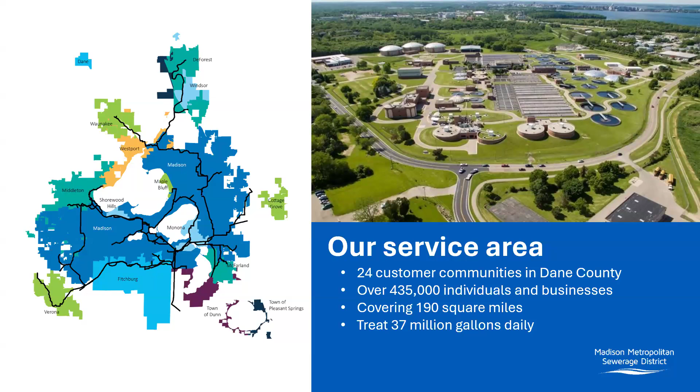On a lesser scale, project drivers like regulatory and resilience, we have very few projects that have those as the primary driver.

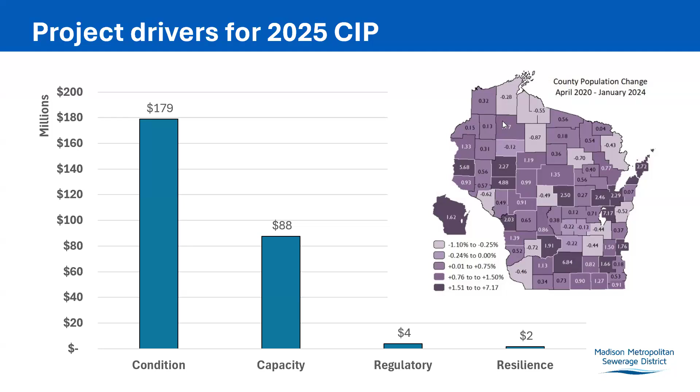Our last 50-year master plan was done in 2009, and this looked at very long range or strategic objectives for the district. Things like, should we continue to convey all the wastewater here to the Nine Springs plant at a central location, or build satellite treatment plants around our service area? Other issues explored were balancing watershed balance and also reusing effluent from the plant.

But very rarely do projects from the master planning process lead directly into the capital improvements plan. Where most of our projects come from is facility planning, which has a much smaller time horizon, usually 20 years. This is where most of our planning work takes place, and most of our projects do involve some component of facilities planning.

For smaller projects, it can be done concurrent with design and can take maybe 2 to 3 months. For larger projects, like the treatment plant, this is a distinct planning step that takes up to 1 year and possibly 2 years to complete. One thing we are noticing is that in the past, large plant expansions required facility planning, but now we're finding that condition assessment is becoming a bigger factor. We're doing facility planning to address the aging infrastructure, which is leading to more projects in our capital improvements plan.

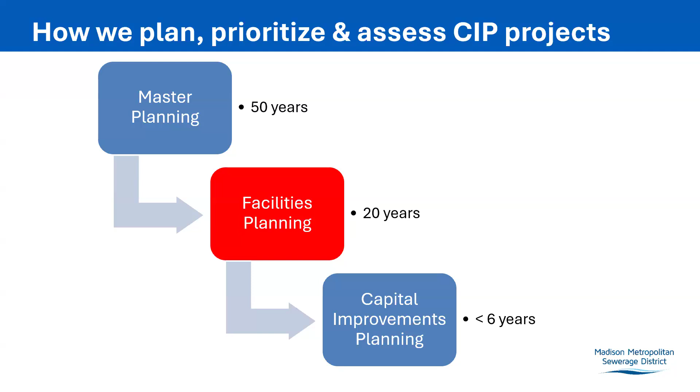Just a few more notes about facility planning. There are really 3 distinct steps. The first is you have to identify a problem or need, and as part of that you're assessing the condition of your assets. The second step is to develop alternatives to address that problem. The third and final step is usually identifying the most cost-effective alternative over the life of the asset, using both economic and non-economic factors.

For most projects, this is a statutory requirement that the DNR requires, and it's a very detailed process in their codes. And a final note on facility planning: the district uses a lot of clean water fund loans to finance bigger projects, and the DNR requires that facility plans be used for that process. So by default, the district does use facility planning for most of its larger projects.

With that, I'd like to get into one of our large facility planning projects that we just kicked off, started last month. This is for our Biosolids facilities plan. Basically the operation of the plant separates solids from the liquid stream. The liquid stream gets treated, disinfected, and returned to streams miles downstream of the plant.

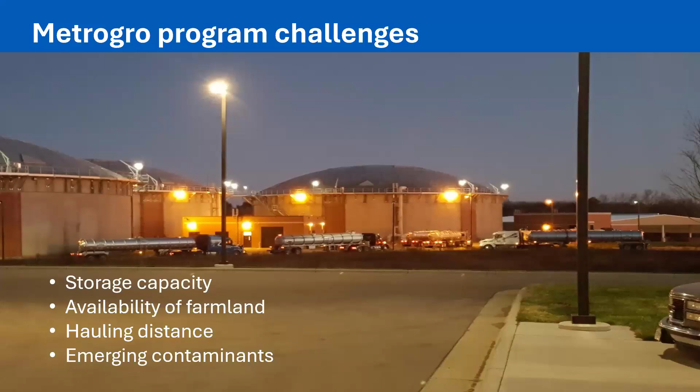And then the final challenge is related to new contaminants that we're seeing. I'm sure everyone has heard a lot about the forever chemicals, PFAS, that is both in our raw wastewater and our biosolids. So we have to be mindful of that challenge as we move forward.

Some of the things that our consultant will look at during their alternatives analysis for this project: we think that we will continue to land apply biosolids going forward. So one option is, can we optimize and expand the current system, likely by providing additional storage tanks and improving our ability to get the biosolids away from the plant.

We'll also be looking at the different processes that we use to produce biosolids. Every aspect of the process, the thickening, digestion facilities, mixing and heating of the digesters will be looked at to make sure we're doing things in the most cost-efficient way and reducing complexity where possible.

And then a final component of the study will be evaluating methods for future treatment of PFAS and other emerging contaminants.

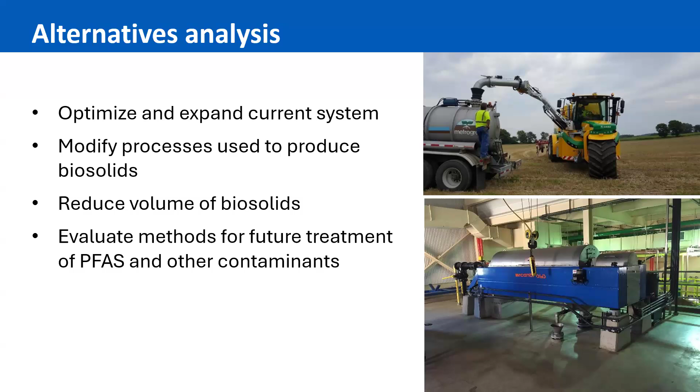The other facilities plan that we're working on currently is called our Heat and Power Facilities Plan. This one is a little ahead of the Biosolids project. It began in June of last year and is set to complete at the end of this year. This plan really looks at our biogas generation and our use of biogas.

Beginning in the early 80s, we started using biogas to generate electricity. We have 3 large engines at the plant, 2 of which use the biogas as a fuel to generate electricity, and 1 as a blower that provides air for the activated sludge process.

The engines also put out a lot of heat, so we're able to recover that heat and use it to heat our hot water system, which then in turn is used for many processes at the plant, as well as building heating and cooling. So it's a very valuable system, it helps us offset a lot of energy costs from our local utility.

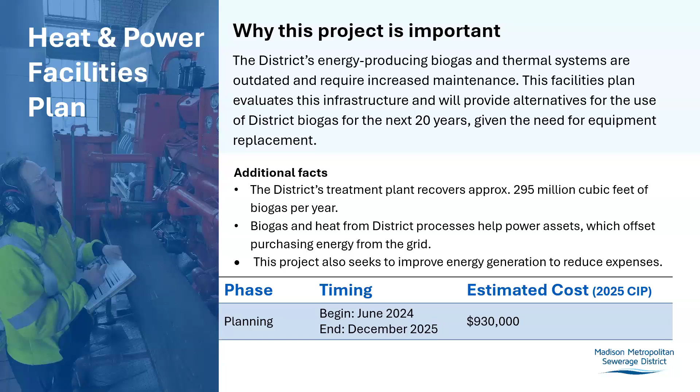But like the biosolids infrastructure, it is aging. It's been in use for several decades, and we need to reevaluate how we're doing things and how we're going to use biogas for the next 20 years.

So here's a picture of one of those engine generators, what we call aging assets. Again, they serve us very well, but they have been prone to failure in recent years. They have been rebuilt several times, some of them. And when that happens, we can't use them to generate electricity. We have to flare the gas many times, and it also takes up time to maintain them.

So what this study will do, next slide please, is in process, but one thing we've already evaluated is the biogas facilities, how they're operating, what we would need to do to improve them. At the same time, on a separate track, we're looking at the heating system. That work has been done, and now we're in the final stages, coming down the home stretch, looking at how we're going to use our biogas in the future.

One alternative is to keep doing what we're doing, basically generating our own heat and power, but only modernizing the equipment, doing it more efficiently. The other pathway is completely different. That would involve treating the gas to a higher standard, removing the impurities, and then selling it for resale, similar to what the Dane County landfill does.

So we hope to have that answer by the end of the year. We don't have any of this infrastructure in our capital plan yet. We're waiting to see what the outcome is and how it interfaces with other projects, but more to come on that in the months to come.

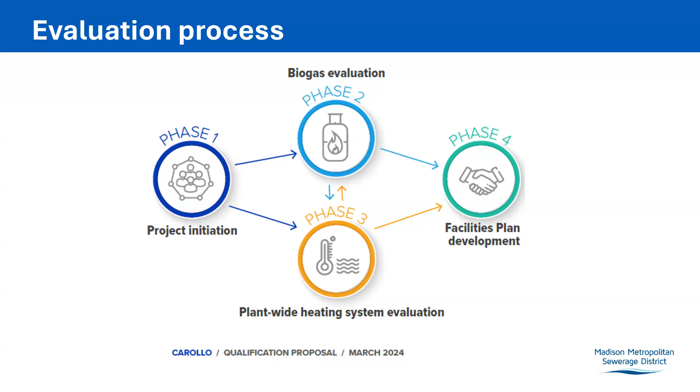Thanks, Todd. Todd covered the facility planning efforts that we have at the treatment plant. So I'm going to explain a little bit more about the facility planning level and our process that we use for the collection system.

So we'll start with capacity. About every 10 years, the Capital Area Regional Planning Commission helps provide population projections and other flow projections from other uses, like commercial and industrial customers in our service area. And that information is based off of census data, so that's why we have that kind of 10-year evaluation process. When we get that updated census data, the projections are then projected out even further.

Those numbers are used in usually 20-year increments, with 5-year periods in between. So we take those flow projections and route them through the collection system, look at how the flows behave, and apply a peaking factor for wet weather events that can occur and cause higher flows in the system. We look at where we're starting to see capacity concerns over those time periods, and where capacity concerns are identified, those become recommended projects that we start planning for. So as Todd mentioned, that facility planning horizon is typically 20 years, but looking in those 5-year increments helps us program them in the appropriate time in the CIP.

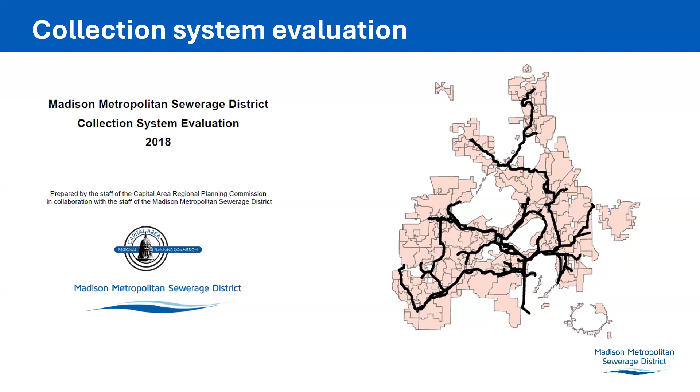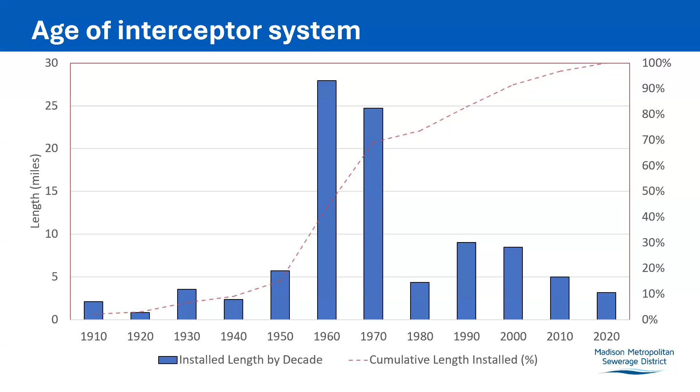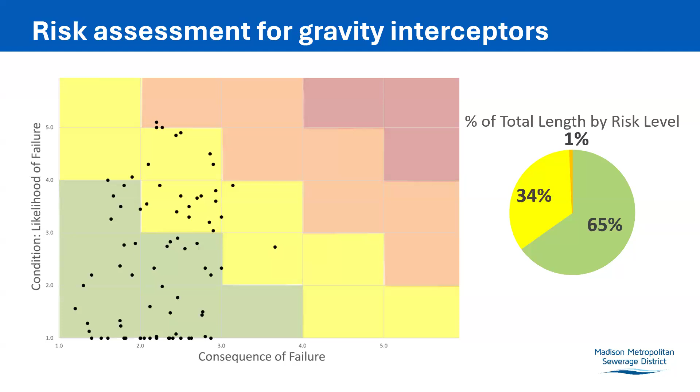So when we're talking about rehabilitation or addressing these concerns, the most common method we'll often return to is what we talk about as lining. So the 2025 CIP had 8 lining projects included for a total estimated cost of $20.5 million over that timeframe. 2 of those projects are being completed this year, one already has been and one's already in construction. So that's great. And the remaining 6 projects, and as I said, there's a few more that will get added as part of our updated assessment process.

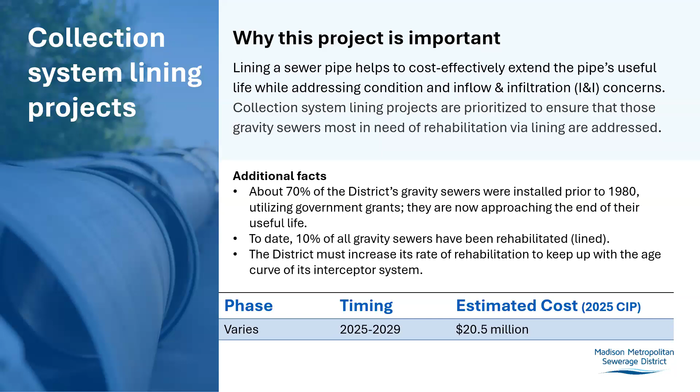So lining a sewer is more cost effective. It really involves just putting a new pipe inside the existing pipe. It's done trenchless, meaning we're not digging to complete that work. And we, going back to that age of the interceptor system, and I noted that lumpiness, so we recognize that we will need to increase our rate of rehabilitation to keep up with the age of the system.

So I've talked a lot about the condition scores and the risk ranking in general terms, and I just wanted to highlight a couple of examples and explain why age is not our only criteria to use to select these projects.

So from left to right, we're going from oldest to newer. So far left, our West Interceptor Babcock to Dayton project that's included in the CIP. That pipe was installed in 1916, and it's a 24-inch cast iron pipe. Cast iron, as it deteriorates, you get corrosion that happens on the surface, so it kind of looks like rust. And that kind of, those sheets start thinning, and so you end up with wall loss. A failure then often happens once that thickness is gone, you get holes in the pipe.

So yes, here's an example of infrastructure that we have that is over 100 years old and is on the list to be rehabilitated, but has not been completed yet. So just tying it back to that risk-based matrix, in this case the condition score is 5 out of 6, so very much in that we need to address zone. But when you consider some of the consequence of failure and then do an ordinal ranking, that is falling as ranked 10.

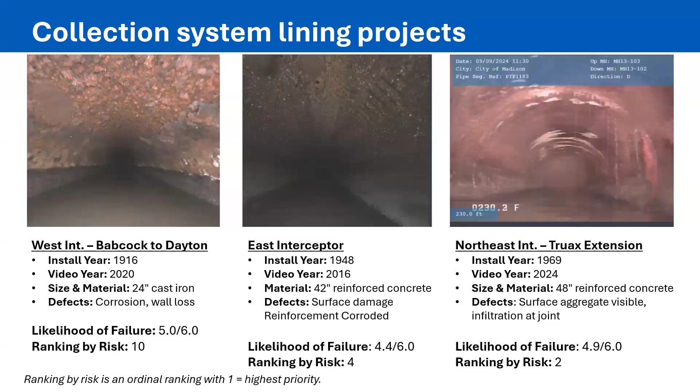So that was a 48-inch concrete pipe up by the airport, required night work, a large truck bed to bring in the liner, a crane to lift it, and the bypassing system was very large. So when we talk about lining projects as a group, they're not all the same. The costs aren't going to be the same, and the level of effort and challenges that you're facing can vary greatly.

So I'm going to transition over to Lisa. I had mentioned the Northeast Interceptor was number 2 ranking. The number 1 worst ranking interceptor based on condition is the Nine Springs Valley Interceptor System. But it also has capacity issues, so Lisa is going to talk about the capacity project.

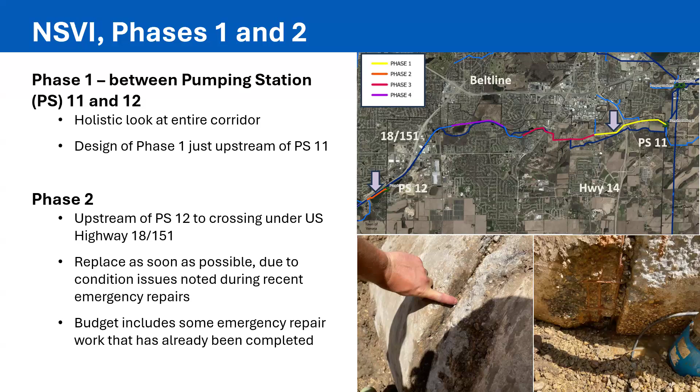Next slide, please. All right, the next project I wanted to talk about is a project at the plant, the W4 project. This is not a high cost project compared to some of our others, but we wanted to highlight it because it illustrates that you have to spend money in order to save money.

So what is this project? The W4 system is an existing system at the plant that needs to be replaced, reaching the end of its life. What the system does is allow us to use treated effluent from the plant for various non-drinking water uses.

So we use the W4 water as wash water for several things, including our screening system and headworks, wash water for the gravity belt thickeners, cooling sludge storage, and even flushing some toilets in the plant, among other things.

Using treated effluent in this way allows us to avoid buying about 300 million gallons of city water annually, and avoid spending about $2 million in city water purchasing costs annually. By replacing this system and continuing to use it, we continue to avoid these additional costs. So how does the system work?

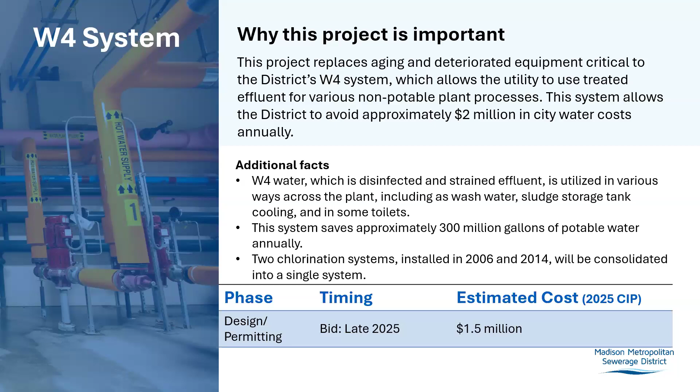In order to make the W4 water, we strain and chlorinate effluent. We currently have two chlorination systems, and with this project we will consolidate those two treatment systems into a single system. You can see here on the slide some pictures of the equipment related to the project that we're going to replace.

As I mentioned, we currently have a second chlorine dosing system in our struvite harvesting building. That system is slightly different - it's a dry calcium hypochlorite briquette system, which has presented maintenance challenges over the years. So we are planning to remove that system and just have the liquid sodium hypochlorite system in Headworks.

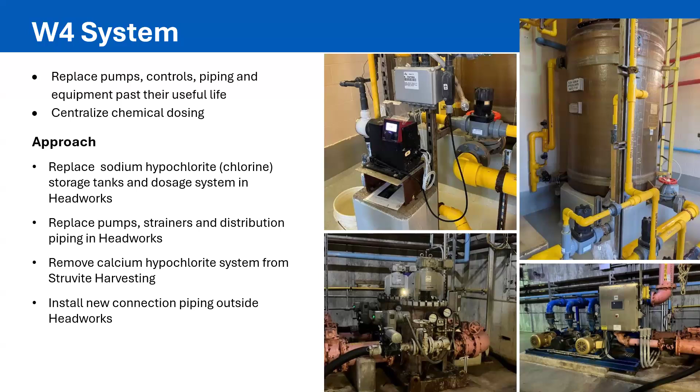In order to do that and go down to a single system, we'll need to add a new piping connection, which we're also planning to include with the project. This project is currently in design, and we're hoping to bid it probably late in the summer or early fall. All right, next slide, please.

All right, the last project I'm going to talk about before I hand it off is the Lagoon Dikes project. Why is this project important? This project is a little unique - it's a resiliency project, intended to prevent flooding of Lagoon 2.

Lagoon 2 is across Moorland Road from the plant. Why don't we want Lagoon 2 to flood? Well, it's a closed Superfund site, and we're obligated to maintain its integrity. Ultimately, this project is about protecting Nine Springs Creek, the adjacent waterway, and preventing the release of PCB-containing materials into the environment.

This project was precipitated by the regional flooding that occurred in 2018 - many folks remember that year. At that time, the dike surrounding Lagoon 2 was nearly overtopped. It didn't overtop and nothing bad happened, but we'd like to prevent a close call like that from happening during future flooding events. All right, next slide, please.

So just a quick history of the lagoons. Biosolids were stored in the lagoons until about the 1970s, when our Metrogro program began. Then in the 1980s, it was discovered that some of the biosolids in the lagoons contained PCBs. In 1990, the site was placed on the EPA's National Priority List, another word for Superfund.

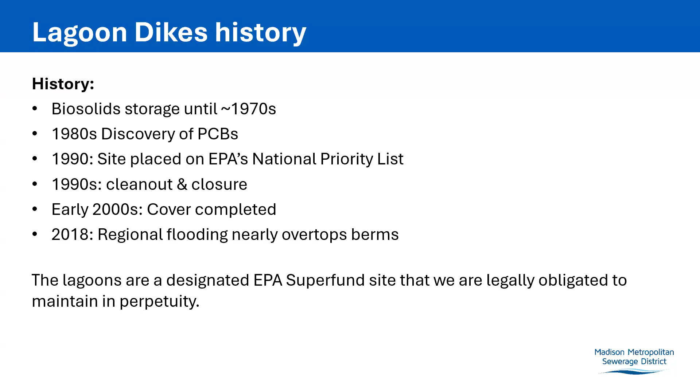Okay, so what are we planning to do with this project? This is a project that sounds simple, but is actually kind of complex. It sounds simple to just raise the dikes a little higher, but

the challenge here is that there are very soft soils below the dikes. It has been a challenge to come up with a design that is constructible with lightweight equipment and gives us enough height on those berms without adding too much weight. We don't want to add too much weight because we don't want to cause even more settlement to those berms. So that is kind of the technical challenge with the site.

There is also permitting challenges with the site. Permitting for the site is complex because of the presence of wetlands, waterways surrounding the area, a floodplain that we are within. We have to deal with federal requirements for the Superfund program, et cetera. So we have been working on permitting with Dane County, DNR, EPA, Army Corps, among others. So very complex permitting for this site.

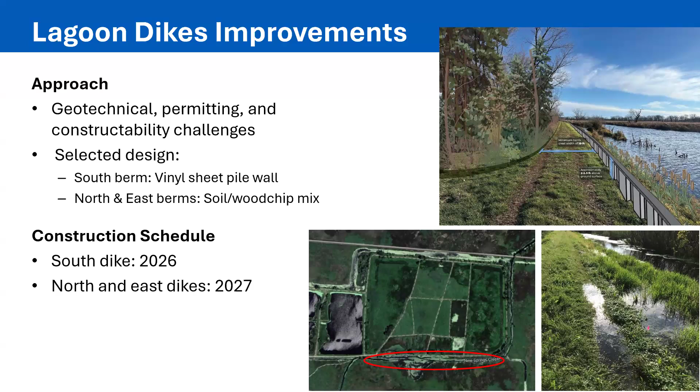Okay, and with that, I will hand it off. I believe Alan Grooms is up next.

All right, thank you, Lisa. Yes, Alan Grooms, I'm the operations manager for the Madison Metropolitan Sewerage District, and I'm going to talk about a couple of projects we've got going.

This one is one of the bigger projects we've currently got going. This is liquid processing improvements phase 2, and this project, just stating that we've got multiple phases, we recently completed phase 1 of what we called liquid processing improvements, and that was focused on the hydraulics of getting higher flows to the plant.

We were really looking at high flows from like a storm event or something like that, where we typically handle about 40 million gallons a day, give or take. We're talking about how do we get flows like 180 million gallons a day through the plant. At that point, you're not focused on treatment, you're focused on getting everything through the plant and getting basic treatment and not spilling is what it really comes down to. So that project was recently completed.

That's given us the capacity to handle the hydraulics, but what has not been addressed is the load that comes with that and the day-to-day load that comes with that. That's really what this project is primarily focused on: capacity. There's also an element of replacing outdated equipment.

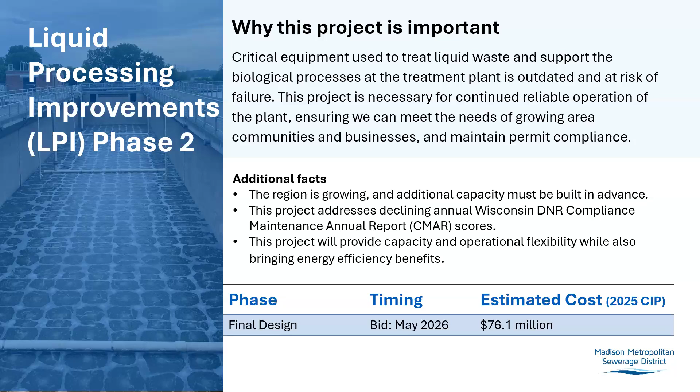So this is showing a little bit of the behind the scenes, what we looked at with evaluating what our needs would be for phase 2. So as Todd mentioned earlier in the presentation, we're working off a typical facilities planning window of about 20 years. That kind of gets out.

You can do a 50-year master plan, you can try and guess what things look like in 50 years and you might get it pretty close. But 20 years is generally the accepted window for planning an actual project, because beyond that it starts getting harder to forecast accurately. You may overshoot or undershoot how much capacity you have.

And so that's kind of the generally accepted planning window. So we were estimating this project would come online about 2030, and so we have a planning window that goes out to 2050.

The population in the service area in 2020, when we started this process, was 408,000 people. We're looking at 2050, and that's going to be up to 558,000. That's the forecast value. Similarly, our plant flows are estimated to go from about 40 to 43 MGD that we were in 2022 up to approximately 57 in 2050.

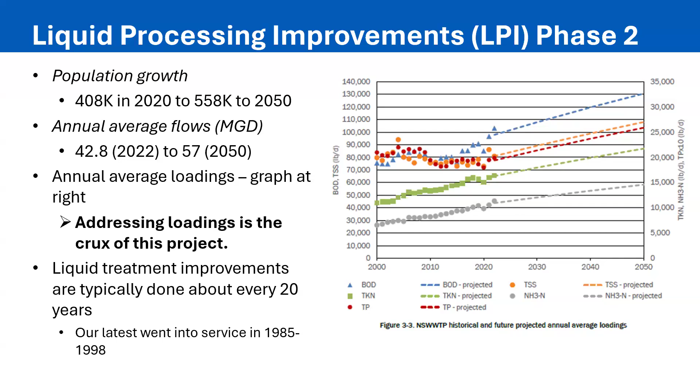This gets more into what we're doing with this project and what's going to be in it. We use the term hybrid BNR, biological nutrient removal system. We are required to treat the biochemical oxygen demand, or BOD, a commonly accepted measure of how much carbon loading is coming to the plant. We also have nitrogen that demands air, and then phosphorus. We are able to meet our phosphorus limits also with the biology in the plant.

We basically construct these plants with big tanks, very specific designs, in order to manage and achieve those levels of treatment we need to meet our permit. The good news is with this process, we were able to do this without adding additional structures or tanks, with the exception of a post-aeration tank, which I'll explain a bit.

What we're doing with this hybrid system, we've been researching for a number of years what we call low dissolved oxygen operations, running at a lower dissolved oxygen level in the tanks to get different microbiology to do work concurrently, working at the same time to do multiple things. Our research has indicated there's a lot of potential with this, and there are other plants doing this work scattered through the country, so we feel like this has got really good potential.

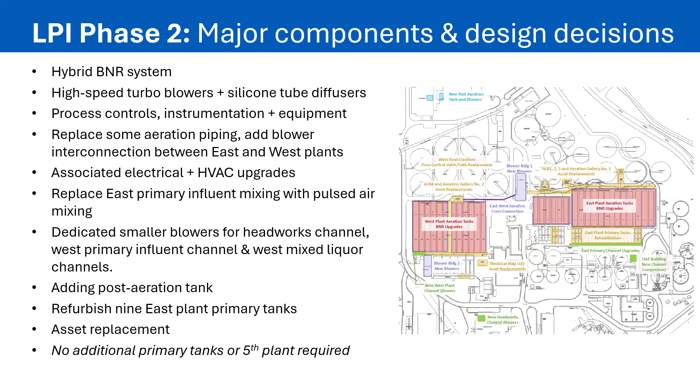A few things we're doing as far as technology - I brushed over some of these, but we're looking at integrating the blowers and trying to use the same type of blowers. We've got a mix of blowers right now, including aging infrastructure - a couple of our mainline blowers are from 1962. I don't know how many people on this call are older than that, but those are older than me. They're still doing good mainline service, but it gets harder to maintain and get parts for units that old, and you can imagine the motors aren't as energy efficient as what you can get today.

The high-speed turbo blowers are basically like a standard centrifugal blower, but they're a lot more energy efficient. They run on a magnetic bearing to reduce friction and reduce those parasitic energy losses. They turn at a really high RPM and push out air, a smaller unit to put out the same amount of air.

We're estimating that with this low DO process we're talking about using, we could reduce our energy purchase by about 18%, using that biological process, and we think we can get as good or even better effluent coming out of the plant with less energy input. So we're pretty excited about it. Even if that doesn't work, with the fallback plan I talked about, we still think we'll get about 7 to 11% energy reduction just with some of the more modern, energy efficient equipment.

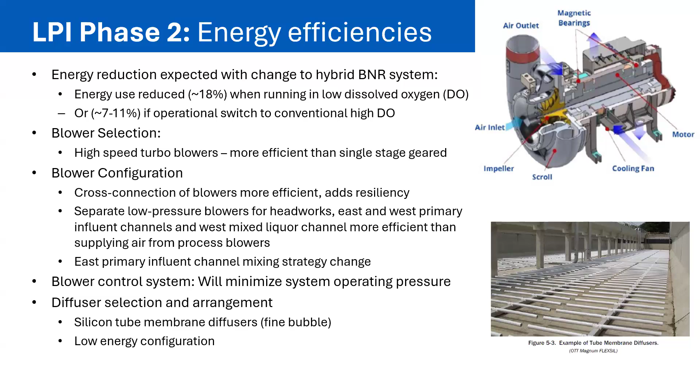And then the other thing we're moving to, we made a selection to go to what we call silicone tube membrane diffusers. It's basically a fine bubble diffuser - a way of bubbling air into the tanks - but it should be even more energy efficient than the system we have now. Next slide.

I'll move on to a different project now. This one is an improvement to a process we've already got, the Ostara nutrient recovery system. What that does is struvite harvesting. Struvite might not be a term familiar to many of you, but with the hard water, particularly high in magnesium here in the Madison area, and anaerobic digestion, we get a lot of magnesium in the water, the ammonia, and then the phosphorus that comes from the biological phosphorus removal. All those combine, and our plant has really struggled, as have many others, with a nuisance chemical precipitate of phosphorus referred to as struvite.

In the solids handling system, the biosolids portion, the struvite will tend to precipitate out and form nuisance deposits that waste energy, waste capacity, and require physical removal in many cases - chipping and breaking, opening up pipes and chipping that out to remove it. That represents a lot of labor and cost in order to keep the system running.

We've struggled with it for many years on how to control that. We ended up putting in, as part of the 11th addition of Nine Springs, which went online in 2013-2014, a struvite recovery system to remove some of that phosphorus from our solids stream before it goes to digestion. That has dramatically improved the issues we have there, reducing the cost of maintaining and keeping the solids handling process operating.

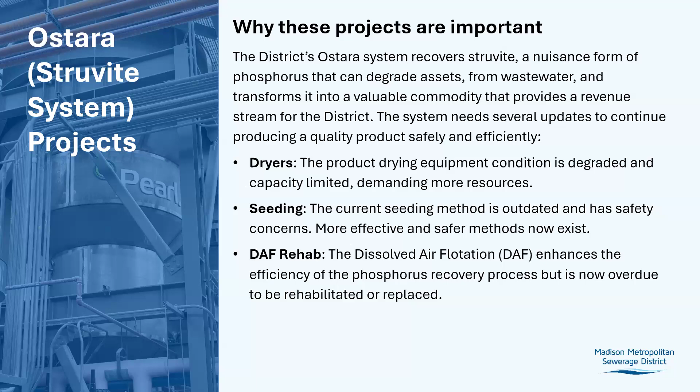So I mentioned the dryer and seeding improvements. For the dryers, the physical condition has deteriorated. They require a lot of - material comes in as a wet slurry of product. That wet environment and the cleaning means we've had to use a lot of maintenance. Some of the early dryers, quite honestly, weren't configured the best to allow maintenance, which has led to a lot of improvising and improvements we've had to do on the fly.

As the material condition affects those, it's pretty harsh service, so those have degraded. The other part is the capacity and efficiency of units available now are much better. So we feel the time has come to look at making improvements that would improve production efficiency and throughput, and also allow us to upgrade the capacity on those.

The seeding aspect of this project - the initial system we put in, it was thought that seeding would be a really infrequent operation. Like I said, this was one of the original systems that went in. It's since been learned that we need to do fairly regular seeding on these systems.

And so the system that we have is actually pretty inadequate and it's really inefficient, and there are some safety concerns with it. So what we're looking at is saving labor and energy with getting the dryers replaced, addressing that deteriorating condition, and then addressing the issues of the seeding system.

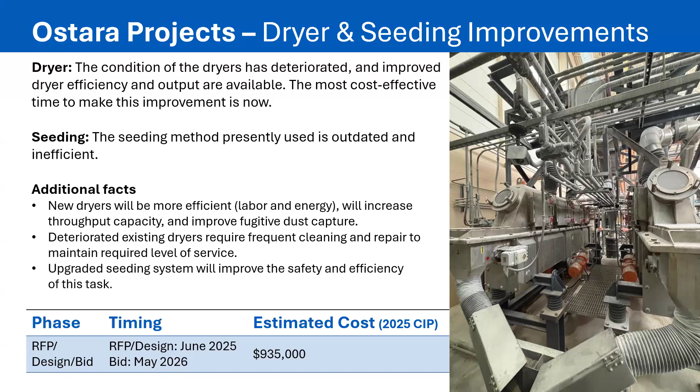And then the DAF rehabilitation, I mentioned the dissolved air flotation. That system was originally installed in 1987, and so that was originally how we thickened our waste activated sludge at the site. That was planned to be taken out in 2013 when the 11th addition went into service.

But as I said, the Ostara system was a fairly new process at the time. Over the years, we did a lot of things to save money, and they were pretty clever innovations to transfer sludge and skimmings and things like that around the site by combining pipes rather than laying new pipes. The downside to that when we put the Ostara process on is there was a lot of extra water contained that was detrimental to that process.

And in quickly thinking how we could address that, we realized we had this DAF that had just been shut down that we could probably get to make work. So we piped it up and it did indeed work. And so instead of being retired and taken out of service, it was pressed immediately back into service and has been serving continuously since 2013.

So 1987 to present day, the exact nature of what it's doing has changed slightly, but essentially that process has continued to operate, and it's a system that at this point needs some addressing. The material condition is down because it was not planned to serve this long.

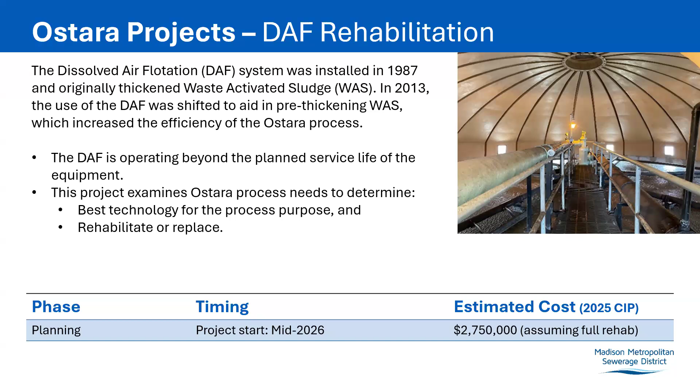So, next slide. I think I'll be turning this over to Eric Rear.

All right, thanks, Alan. I'm Eric Rear, Maintenance and Reliability Manager for the district, and I'll be talking about two relatively smaller collection system projects compared to what Alan just talked about.

But first off, I'll be talking about our Crosstown Force Main Saddle Tap Replacement Project. The Crosstown Force Main was constructed in 2002. It's a vital piece of infrastructure that connects our Pump Station 1 to our Pump Station 2. It's a 30-inch diameter pipe, stretches approximately 3.5 miles down the isthmus.

Pump Station 1 is located at First Street. Pump Station 2 is located at Brittingham Park, so basically right down the isthmus—that's how those are connected. Under our normal operating mode, Pump Station 1 is sending wastewater to Pump Station 2, and from there it comes to the treatment plant. But under emergency situations or for maintenance needs, we can convey wastewater from Pump Station 2 to Pump Station 1.

The project is really important because the risk of the saddle taps on this force main failing is rising, increasing the risk of sanitary sewer overflows in the downtown isthmus area. Next slide, please.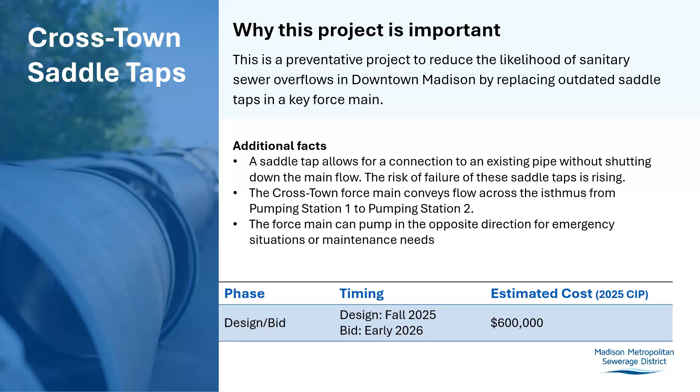So due to the topography of the isthmus and the existing utilities that needed to be crossed when the force main was installed, it had to be constructed with 21 intermediate high points. Each of these high points requires a manhole structure with a saddle tap and a combination air vacuum release valve. This allows any entrapped air to be evacuated from the force main.

The buildup of air in these high points drastically reduces the flow rate through the force main and the efficiency of the pumps, which results in higher energy costs to convey the wastewater. So that's why it's critical to get the air out of these high points when we're pumping wastewater between the two stations.

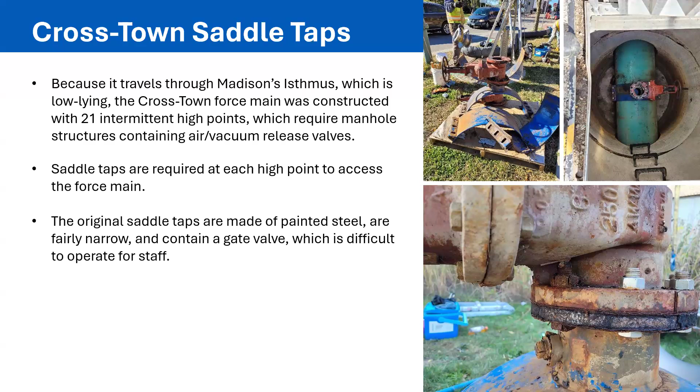In 2024, we budgeted a project to replace 5 of the saddle taps that were in the worst condition along the crosstown force main. These were deemed to be in the worst condition using our condition assessment tool, which our collection system services group uses for annual condition assessments of our manholes.

The new isolation valves are quarter-turn plug valves. So instead of turning the valve 20 times to close it, the operators or workers just need to turn that handle about 90 degrees or 45 degrees and the valve is closed — much easier, much safer for them to operate.

So in 2026, the remaining 16 saddle taps are going to be replaced in the same manner, with stainless steel saddle taps and quarter-turn isolation valves. The other 16 may not be in as poor a condition as the 5 that were replaced, but our maintenance philosophy here at the district is reliability centered maintenance — we look to repair and replace infrastructure before it fails so we can adequately plan and budget for it. In this case, we foresee these will eventually get worse and fail, so we're doing this now while we have proper budget and planning.

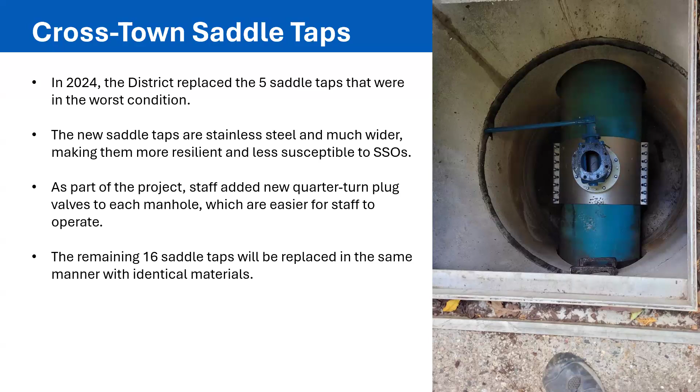Okay, second project for me is the pumping station bar screens. To start with this project, I'll go to the headworks building at the treatment plant.

The headworks building at the plant was constructed in 2005 during the 10th addition project. That building receives wastewater from 5 of the regional pump stations. During that project, we installed 3 rotating band screens as a method of screening wastewater in the headworks. These are a type of finer screen with very small holes, and their function is to remove finer debris from the wastewater.

Band screen manufacturers recommend coarse screening prior to the equipment to prevent damage and reduce maintenance. But currently there's no coarse screening implemented ahead of these finer screens, except at Pump Station 18, which is our newest pump station. Coarse screens typically have 1-inch bar spacing, so they remove large items such as rags, trash, and other debris 1 inch or larger in size.

So under this project, the remaining 4 pump stations that come to the treatment plant will receive bar screens to provide the necessary coarse screening ahead of the band screens. This would include pump stations 2, 7, 8, and 11.

For reference, these bar screens are self-raking devices that run on a differential level indicator. Once debris builds up on the bar screen, a series of rakes go down under the waste stream, rake the waste up into the bar screen through its compactor, and those screenings are then pushed into a dumpster for easy disposal and pickup.

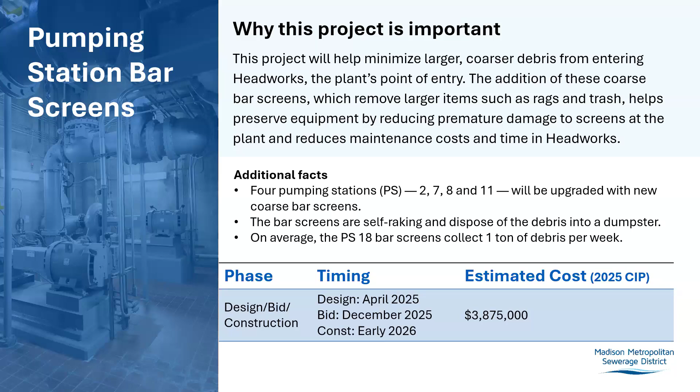So the 4 remaining pump stations that will receive the bar screens actually have existing screening channels in their wet wells that would be modified for installation of the new screens. This will really save us on cost and time because new screening channels don't need to be constructed in each of these pump stations.

3 of the 4 pump stations also have room in their wet well area to house a screenings dumpster, deferring any structural modifications to house those dumpsters. Pump station 7 is the only one that will need some modifications.

So the new bar screens at the 4 remaining stations will have a similar setup. Pump station 18 is designed with 2 screens. The other stations will be designed with just 1 screen and an emergency overflow channel.

Just for reference, bar screens at pump station 18 remove approximately 1 ton of debris from the influent waste stream per week. The majority of that is basically rags coming through, but they are removing a ton and saving that from coming to the treatment plant.

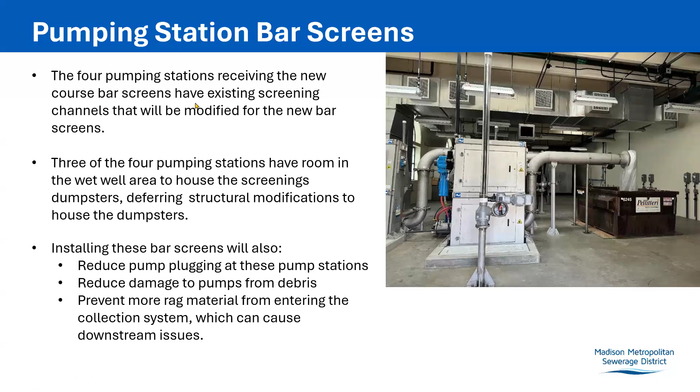Nope, you're actually turning it over to me, Eric. Oh, sorry Amanda about that. That's okay. This is Amanda Wegner, the Communications and Public Affairs Director here at the district. So I'm just going to close this up here.

On August 6th, this is really for our customer communities - we are having a community budget preview meeting that has been in Eric's email the last few months, but invitation will be coming in another month or so. But if you want to hold the date, there it is.

And then September and October is really when we are in full budget season mode. We will present on September 11th the proposed 26 operating, capital projects, and debt service budget - again, that is at our commission meeting. And then on October 30th is the review and adoption of those budgets.

So just some dates to keep in mind for those commission meetings. Those are open to the public and they are live streamed. So if you cannot make those meetings on Thursdays, usually at 8 a.m., sometimes we delay the start to accommodate special meetings, but we do make those available on our YouTube channel, or you can watch them asynchronously.